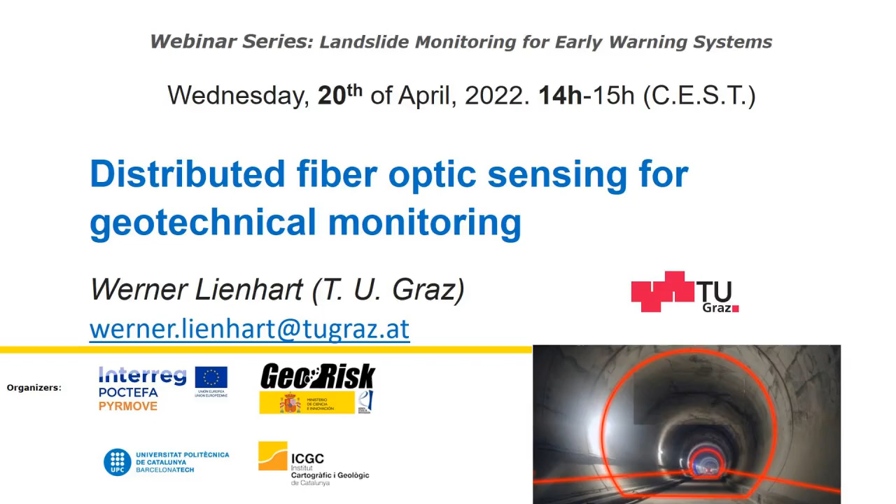It's a really great pleasure for me to be here, at least virtually, and to share my personal experience and also the experience of my team in distributed fiber optic monitoring with a special focus on geotechnical monitoring.

As Jose already said, by profession I'm a geodesist, so I studied geodesy at Graz University of Technology and also at Nottingham Trent University in the UK. Regarding measurement technologies, I have a background in classical geodetic sensors, meaning total station, laser scanners, GNSS sensors, and also from my role as a product manager at Leica Geosystems at the headquarters in Switzerland. For more than 10 years, I've been full professor at Graz University of Technology, where I'm head of the Institute of Engineering Geodesy and Measurement Systems.

Because we see that fiber optic sensing is really ready to go on the market, we also founded a spin-off company last year, ACI Monitoring. There we handle the more proven technologies from an industrial company side, while what is still research stays at the university. As already said, I'm Vice President of the International Society for Structural Health Monitoring of Intelligent Infrastructure, ISHMII, and I'm also President of the Austrian Geodetic Commission.

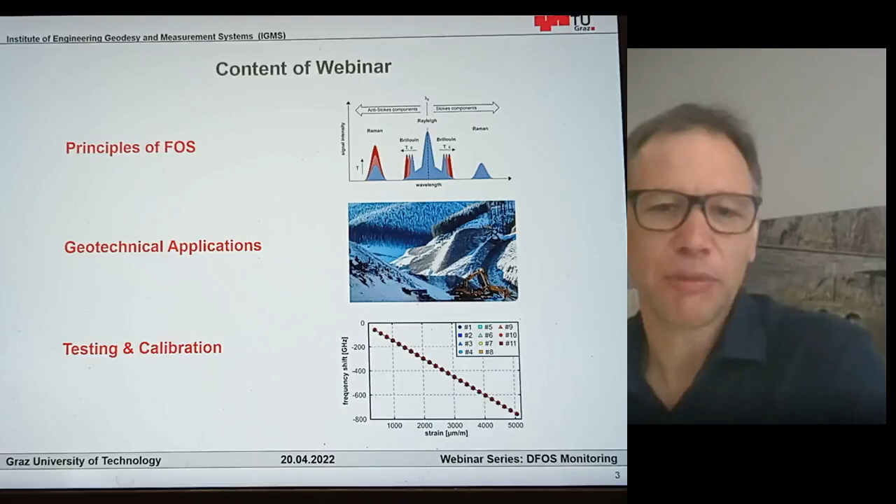What I also want to highlight today is that testing and calibration is also a very important aspect in order to perform a successful fiber optic sensing monitoring project. So this is the program for today. We have about 40 minutes. If you have questions, just type them into the chat or ask them at the end of this talk.

When we talk about fiber optic sensing, there are some common principles. Historically, fiber optic sensing started with sending light into a fiber and having one specific section of the fiber with a strong back reflection. So historically speaking, sensing started with single point sensors. These were very often interferometric sensors having mirrors inscribed into their fiber, giving a strong back reflection. By, for instance, interferometric principle, it was possible to utilize light along the fiber as a sensing device - very accurate, also dynamic measurements. However, the drawback here is you still need one cable for one sensor.

It became more important and more interesting when we talk about distributed or quasi-distributed fiber optic sensing. Quasi-distributed fiber optic sensing means we have several measurement locations along the fiber. One example would be fiber Bragg gratings - wavelength-dependent mirrors where you can have tens of sensors along the same line. This is already a big advantage compared to, let's say, classical resistive strain gauges, since with one cable you can depict lots of measurement positions along your fiber.

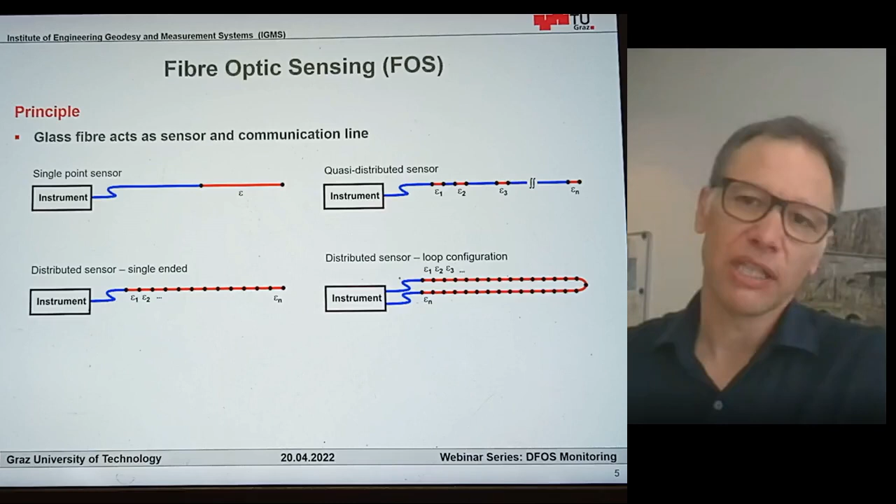There are single-ended configurations, there are loop configurations, but what's important here is range and spatial resolution. Typical values are: if we go for long ranges, let's say several tens of kilometers, we usually have a spatial resolution in the range of half a meter or a meter, so rather broad spatial resolution, but very long ranges, well suited for long linear infrastructure like pipelines or railway tracks.

Or we could go for shorter range, let's say a few tens of meters or maybe 1 or 2 kilometers. Here we can achieve a spatial resolution of about 1 centimeter. Either way, we are able to realize thousands of measurement positions with just one single measurement. So we send out one light pulse into the fiber and obtain a lot of information along that fiber. This is the basic principle of distributed fiber optic sensing.

And when we go further into that, we can also see different technologies in distributed fiber optic sensing. So let us first take a look at the difference between data communication and distributed fiber optic sensing. In data communication, the main goal is to transmit information along the fiber. So light is injected, transmitted, and the light at the end of the fiber is being analyzed.

In distributed fiber optic sensing, we actually do not really care how much is ending up at the end of the fiber. We are working with back reflected light. And depending on the application, we talk about distributed strain sensing (DSS), distributed temperature sensing (DTS), or distributed acoustic sensing. So one can think of that like thousands of resistive strain gauges, thousands of microphones, or thousands of temperature sensors along the same fiber.

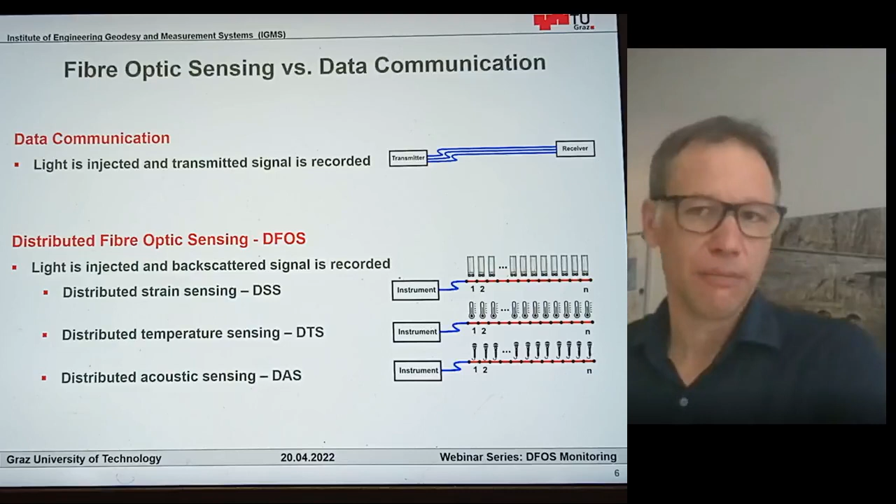So how does this now work? If you take a look at a typical setup, we send a light pulse into the fiber. And this light is actually being reflected at every location along the fiber due to natural inhomogeneities of the fiber. And this backscatter signal is sensitive to either strain or temperature, or to strain and temperature.

So let us take a look at this example. We send in a light pulse. We have a certain carrier wavelength and we send out a light pulse. Most of the light is being reflected at the same wavelength. So the back reflected signal has the same wavelength as the incoming signal.

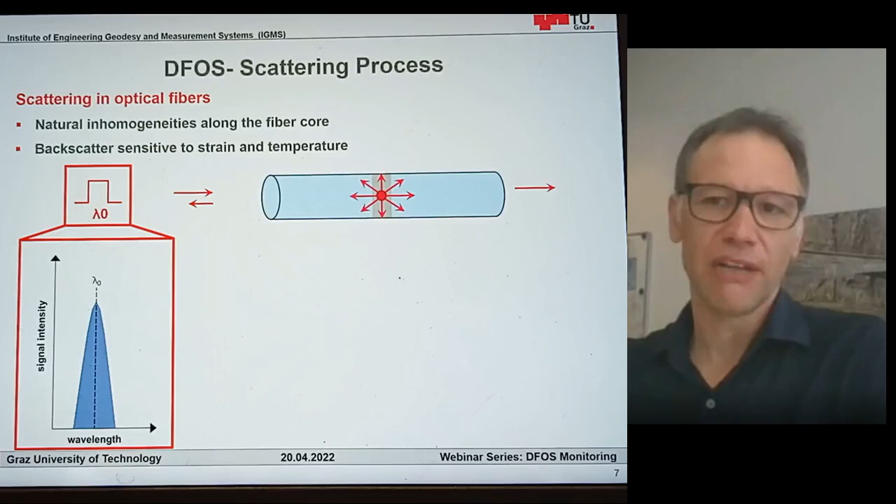However, there are also other components being reflected. These are the so-called anti-Stokes and Stokes components. Some of you may have seen that graphic in different ways already. One way would be if you take a look at the Raman backscattering. This is further off the central wavelength, and here we have a Stokes and an anti-Stokes component.

Interesting here is that mainly the anti-Stokes component is sensitive to temperature. So it's almost insensitive to strain, with a strong temperature sensitivity in the anti-Stokes component. So what you can see here, if we monitor the intensity or the ratio of intensities of the anti-Stokes component, then we can get information about the temperature along the fiber.

If you take a look at a different effect, which would be Brillouin backscattering, here we do see a wavelength shift. So we see a frequency shift in case of temperature and strain changes. And this enables us to get information about deformation along the fiber.

If we put some numbers to that principle, when we take a look at Rayleigh backscattering, it is usually used in high resolution distributed strain sensing and in distributed acoustic sensing. When we talk about high resolution strain sensing, this means we have a measurement precision in the range of tenths of a kelvin and about 1 microstrain, and a spatial resolution of about 10 millimeters or better, but only over very short range.

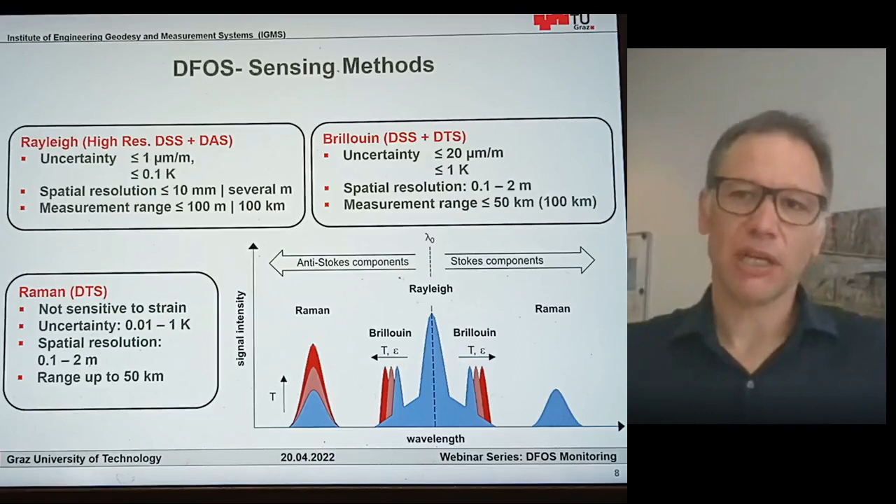Regarding strain sensing, for long distances, the technology to use is Brillouin-based measurements. Here, as I said, we are sensitive to strain and temperature, but with the right setup, we can compensate the temperature dependency, and we end up with a resolution in the range of 10 to 20 microstrain, but for very long distances, also about 30, 40, 50 kilometers, or even hundreds of kilometers.

So these are a few things to note. When we talk about distributed strain sensing, we work with natural back reflection. Here we have three different components. There's Rayleigh backscattering, which has the same wavelength as the incoming wave, mainly used for high resolution strain sensing and for DAS. We have Raman backscattering, where we have a temperature dependency, which matches an intensity change in the anti-Stokes component. And we have Brillouin backscattering, which causes frequency shifts when the strain and/or temperature changes.

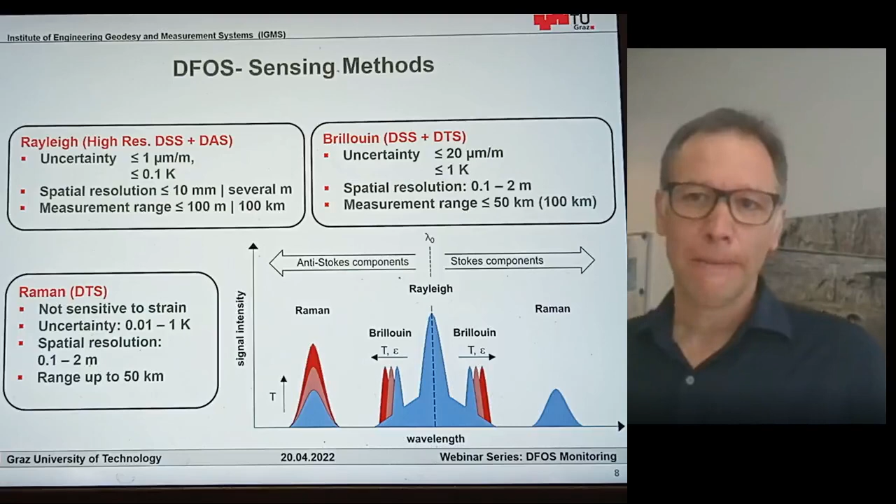So this is just a little bit of background. We're coming back to that at the end of the presentation when we talk a little bit about calibration. But the main focus now is how can this technology be deployed in geotechnical monitoring? So we're going to take a look at different geotechnical applications, and actually whatever you can think of has already been done with fiber optics.

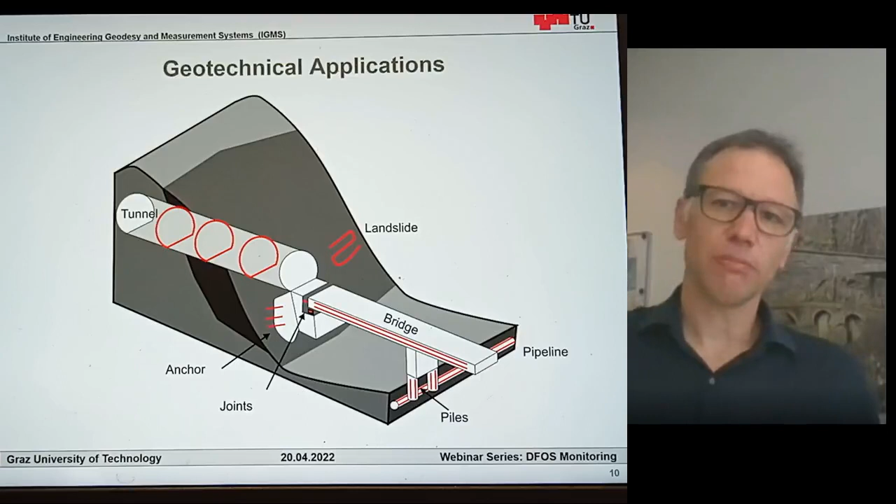So fiber optic sensing, or distributed fiber optic sensing, has already been employed for tunneling applications. It has been used for landslide applications. It has been used for concrete structures like bridges and piles.

Out of this selection, I have now chosen three different areas where I would like to show you what can be done, but also show you some principal challenges which occur when you deal with distributed fiber optic sensing. The first example I want to show today is an application about a reinforced earth structure.

As some of you may know, we are currently building three very large tunnels in Austria: one being the Semmering base tunnel, another being the Koralm tunnel, and the third the Brenner base tunnel. Here we're talking about the Semmering base tunnel, which has two tubes, each 27 kilometers long.

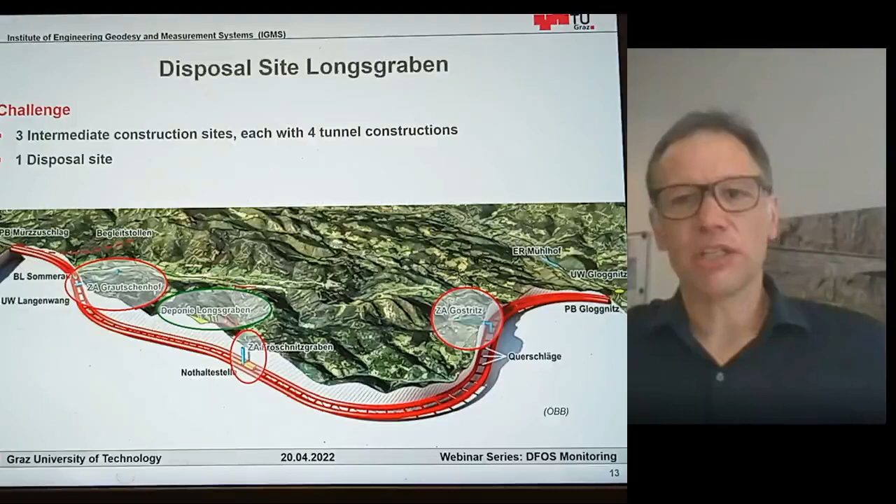How does such a disposal site look like in an alpine area? It's pretty simple: you have a valley and you basically fill it up. This is the valley as it was before construction activity started. The trees have been removed, and now it's more or less prepared for the landfill. However, as you always have in those alpine valleys, there's a stream at the bottom of the valley.

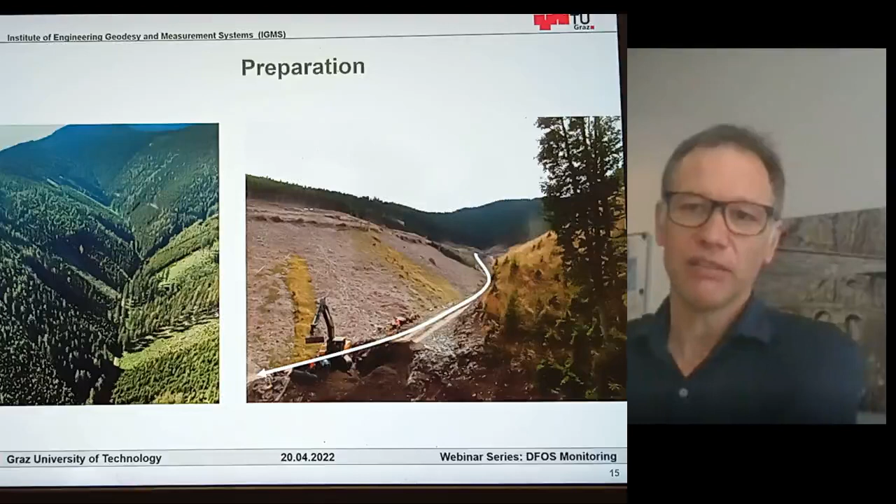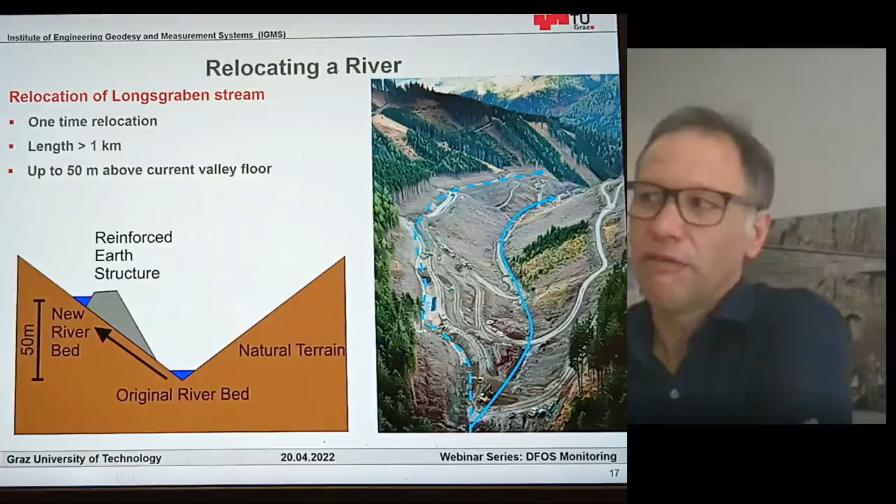From a technical point of view, the easiest way would have been to put that stream into a massive tube, but this was not allowed due to environmental reasons. So the final solution has been to take this river stream and shift it up 50 meters into a new riverbed, supported by a reinforced earth structure, and then fill up the terrain. In the end, this new riverbed will finally be again at the bottom of the newly constructed valley.

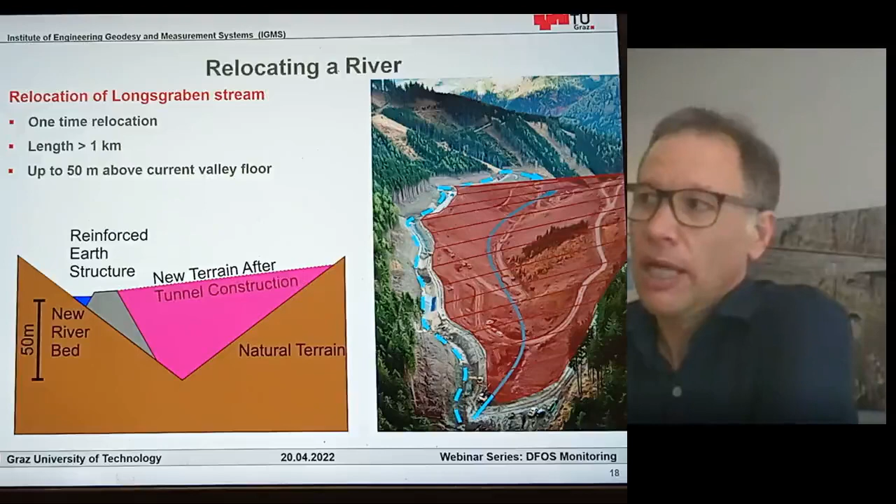The big question was: what happens during the construction phase? After the whole valley is filled up, everything is fine, because then the retaining wall cannot fall over anymore. However, during construction, it was planned to have a very high, very steep reinforced slope in order to maximize the volume available for the disposal site.

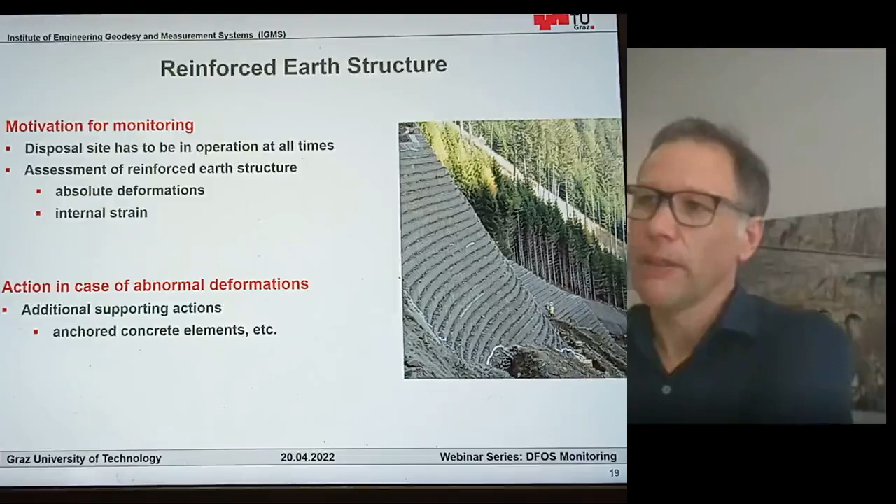The disposal site has to be in operation at all times, and therefore monitoring was needed. The monitoring system consisted of two parts: one was to determine absolute deformations of the dam, meaning tilting or settlements, but also to get information about the internal strain, meaning what is the current utilization grade of the geogrids—are they close to rupture, or is everything still intact?

There was also an action plan behind this, so in case thresholds would have been exceeded, additional supporting actions would have had to be taken.

What I like about this example is that it's a typical setup in most of our monitoring projects when we use distributed fiber optic sensing. Very often fiber optic sensing is not the only technology being used, but it complements traditional technologies. Like in this case, we have total station measurements to points on the surface of the structure, so we know about absolute displacements, rigid body motions, and possible tilting or settlement of the whole structure. But what we don't see is any idea about the internal strain distribution, and this is where distributed fiber optic measurements come into place.

Here we are going to take a look at one-dimensional longitudinal strain, strain basically being a length change divided by base length. So here we're interested in how the strain looks like in the longitudinal direction.

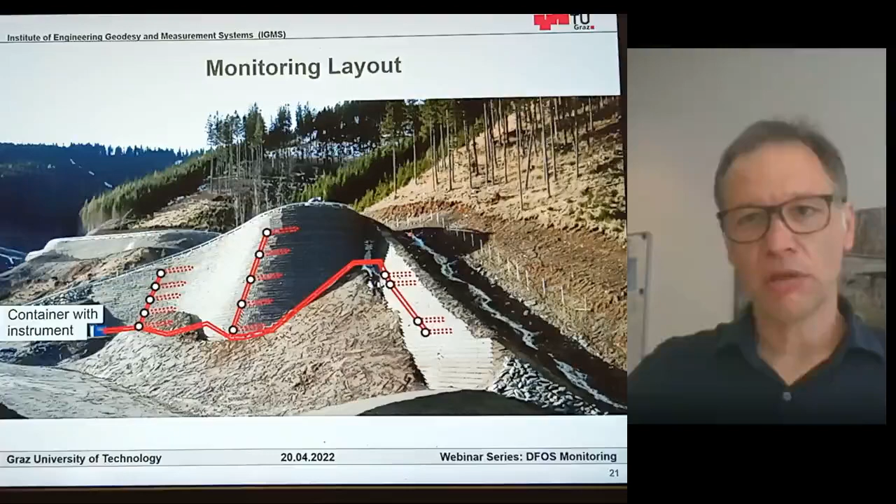But also, that system was meant to be there for the long term, basically for the time until the full disposal site is filled up, in order to see if there may be some problematic situations occurring during operation. So let us take a look now at both situations, first at the construction time, then at the long-term strain development.

So what we can see here is the strain development during the construction phase. We are going to take a zoom look into one of the cross sections. Actually, we are looking inside of the earth structure, an area which is typically not accessible with classical geodetic measurements.

And what we can see, as expected, is an increase during construction as more and more material is piled up on top of that level. However, even after construction stopped, we can still see some creeping behavior, which slowly stabilizes. Here we are at strain rates of about 1% or a little more, which is still perfectly fine for the sensors, but also fine for the geogrids as well.

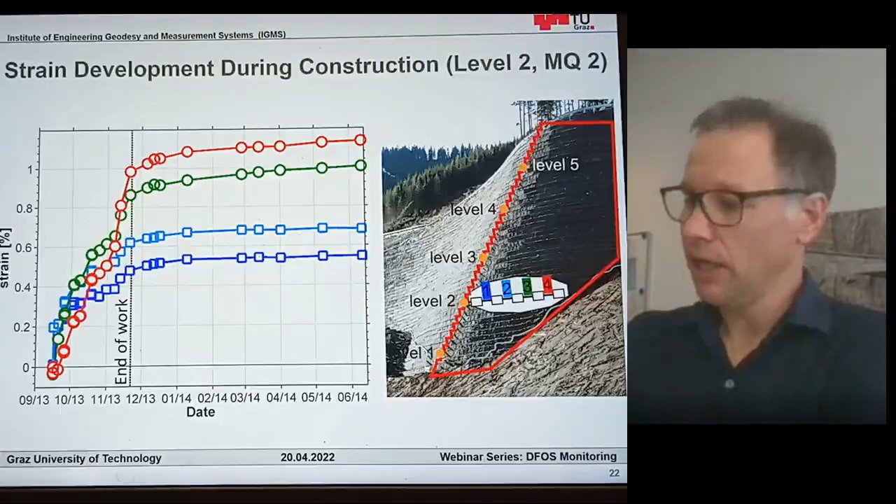So this was the construction phase. I want to give you some pictures of how the structure looks. Here we can still see right after construction finished, without any vegetation.

This is then 2016. We can see already grass coming up again, however the landfill just started. About 3 years later, from the same spot, you can see that the disposal site is almost full. You can see here just a massive amount of volume, which is coming from the 3 construction sites.

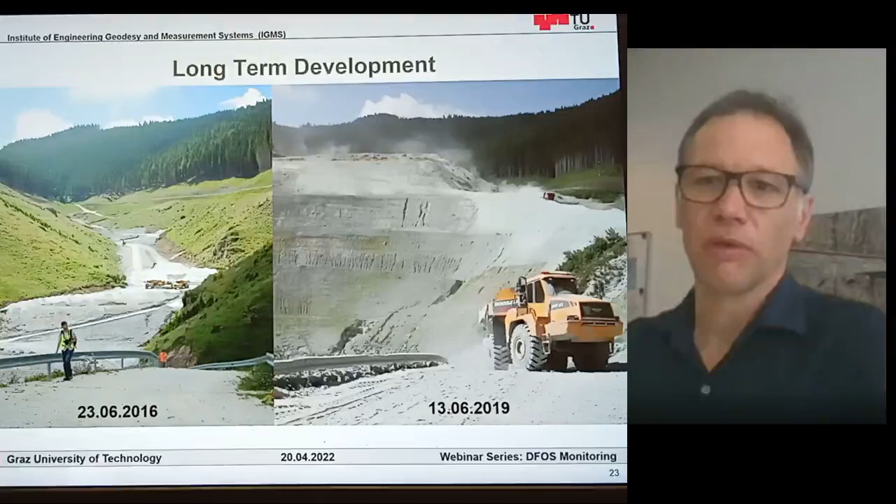When we take a look now at the long-term strain evolution, we do see again the starting phase. We can see everything stabilizing, and suddenly we see a jump in the data series. Between these two measurement epochs, suddenly there was a massive increase of strain. The question was, what happened at this specific point in time?

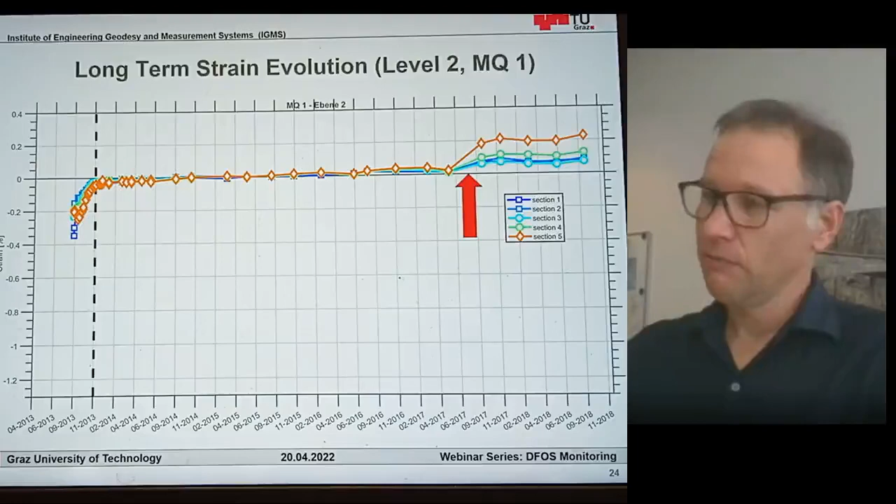Actually nothing was wrong with the structure itself. There were some modifications being made. When we take a closer look, we can see a curved section of the structure with a rather narrow curve, which works only for regular sized trucks, but not for the big dumpers.

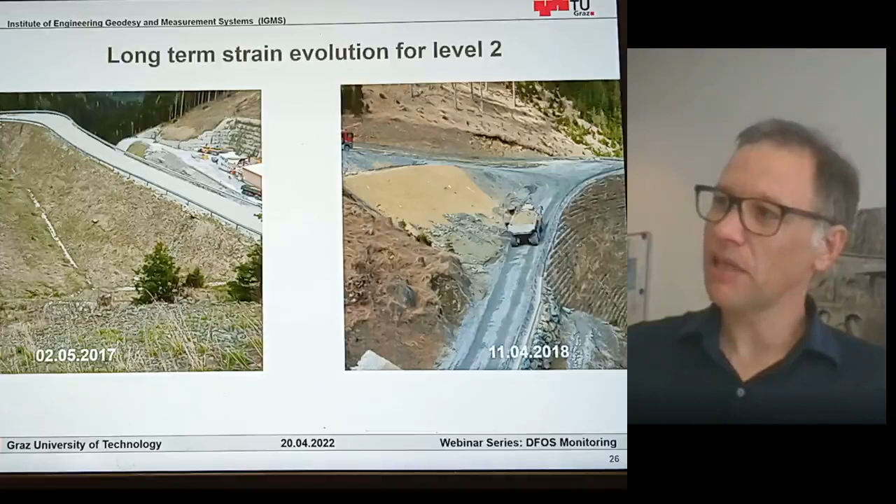In order to be able to cross or pass by here with heavier trucks, it was necessary to fill up this area as well, as you can see on the right-hand side. So we can see the situation before and then afterwards. There's much more space now for making the turn, which enables heavier machinery to get around the corner as well. So we do see the impact of this modification of the structure.

Everything is still fine, so no problem for the geogrids, but still we can detect those changes. So everything worked fine during the construction phase, small strain development after construction, then that one jump due to the modification, and everything was okay.

And actually now the whole area is filled up, and the reinforced earth structure cannot topple over anymore anyhow, since the disposal site is more or less closed because it became full. So this was one example where we can already see that the technology works for several years.

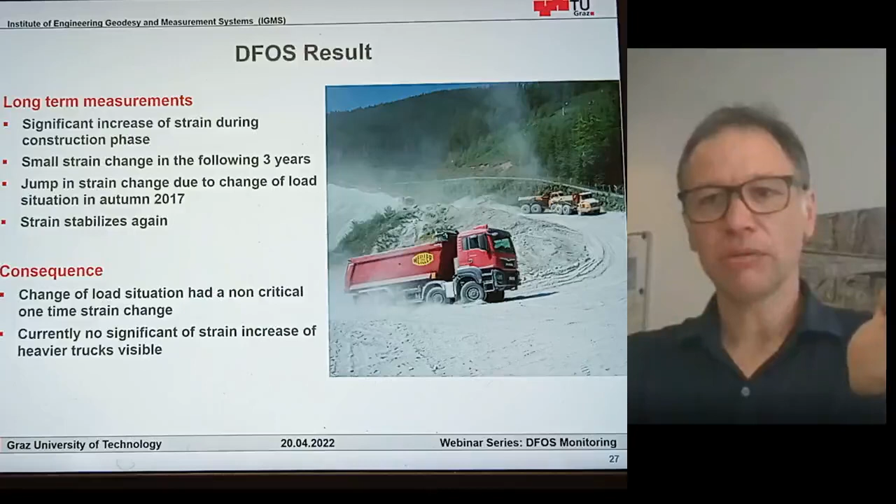We can detect changes. However, in that application, the main focus was just measurements along the fiber axis, so the main result was longitudinal length changes. But let us take a look now at a different application. Next, I would like to show you some applications in tunneling.

Regarding tunneling, we have done a lot of work within the last 10 years. We have equipped outer linings with fiber optic sensing, inner linings with fiber optic sensing, and tunnel lining segments with fiber optic sensing cables. We have also retrofitted existing tunnels by placing fiber optic sensing cables on the already existing surface of the tunnel.

We have installed systems in several railway tunnels, including the Koralm tunnel, the Semmering base tunnel, and the tunnel chain at Zentrum am Berg. We have equipped existing highway tunnels like the Arlberg tunnel and Tauern tunnel, and also a newly constructed tunnel on the highway S7. We are also involved in a sewage tunnel project.

But what's the benefit of having distributed fiber optic sensing in tunneling? I want to show you this by giving two examples, one coming from conventional tunneling and the other one from tunneling with tunnel boring machines.

Let us first take a look at conventional tunneling. A typical situation: classical monitoring, tunnel excavation and displacement measurements with total stations. When we talk about conventional tunneling, you can see that the whole cross section is never cut out at once. You usually have at least 2 or 3 steps.

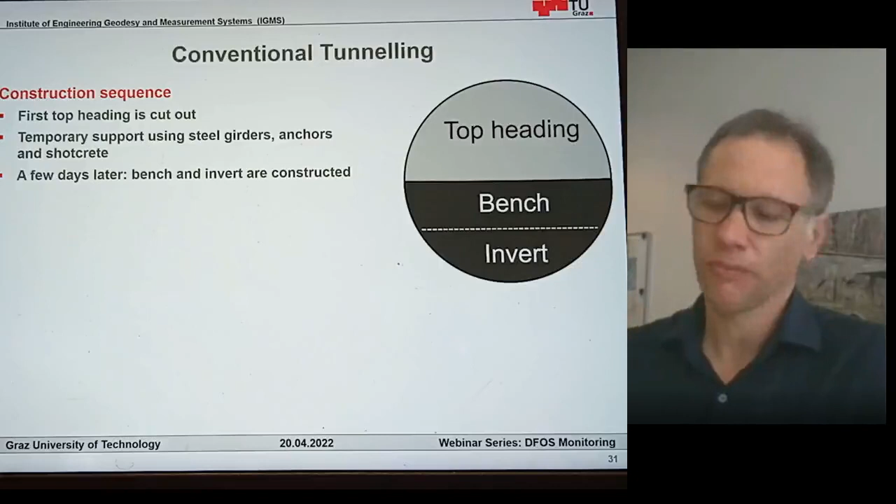First, the top heading is cut. Then this is temporarily supported with steel girders, anchors and shotcrete. After a few days, the bench and invert are being constructed. So you have the top heading advancing, and then with a delay of several days, you have the bench and invert.

The behavior of the lining has to be monitored because deformations are basically allowed, but they have to stabilize after several days, or at least within the first 4 weeks. So monitoring is an essential part of the progress, because the monitoring results determine how you continue construction.

You decide about the excavation round length, how much support you need, how many girders, how many anchors, and also the thickness of the shotcrete layer. So monitoring has a direct impact on the construction sequence, on the construction speed, and on the material needed. Monitoring is a must, and conventionally this is done with classical total station measurements.

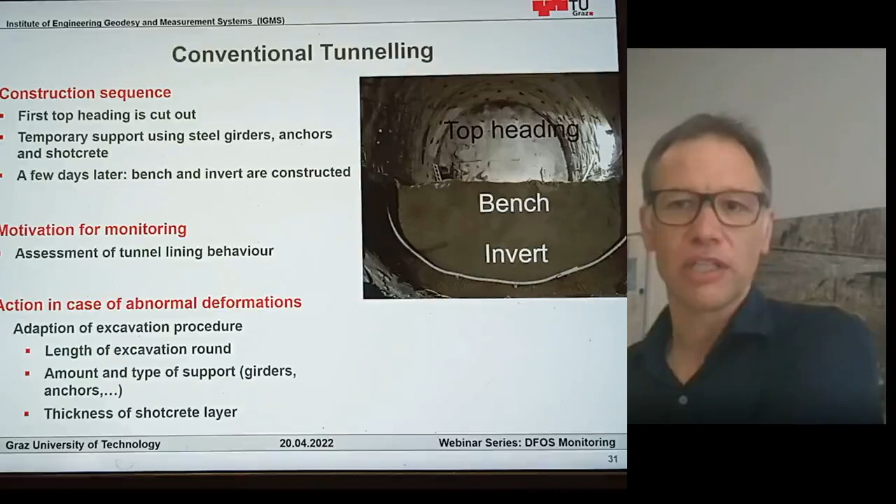You can see here a situation with several cross sections with bireflex targets, all arranged as flashing points along cross sections. Usually you have about 5 to 7 points along the cross section. However, what you can already see is that you don't get a complete picture.

First of all, we only get a few measurement points at one cross section. The bench and invert cannot be monitored. And as measurements are usually carried out only once per day and only close to the tunnel face, you don't really get detailed information about the long-term behavior. And like usual, with a tripod, you're always in the way, so the measurement itself interferes with the construction progress.

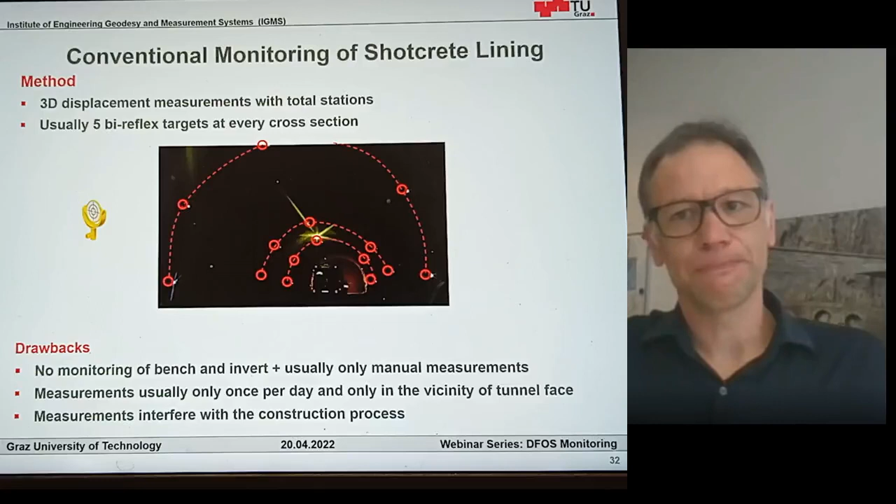Here the idea is to use distributed fiber optic sensing for both the construction and the operation phase of the tunnel. Several cross sections are equipped with fiber optic sensing, and because of the long measurement length that is possible, the instrument itself can be even outside of the tunnel, so the measurement doesn't interfere with construction or operation. Of course, you need some time for the installation, but the measurement itself has no impact on either construction or operation.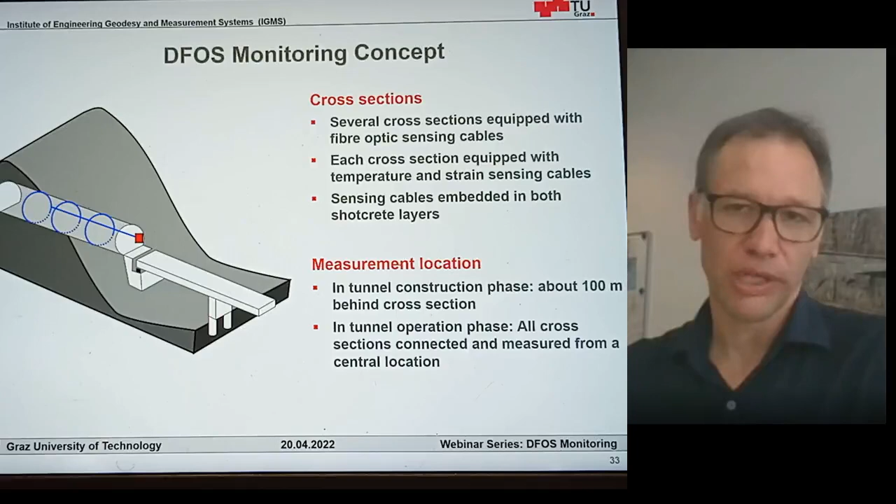What is important to note is sometimes there's a discussion: can dark fibers be used? Dark fibers are fibers within communication cables which are not being used. For distributed acoustic sensing, yes, this can be done. But when we talk about high accurate strain sensing, we do need a specific strain sensing cable.

Let us take a look now at the difference. A communication cable usually consists of a huge number of single mode fibers, but the main purpose of the communication cable is data communication. Therefore, the cable should not experience anything happening on the outside. So the fibers can move freely, at least to a certain extent, within that cable—they could be gel filled, or there could be some air gaps in between.

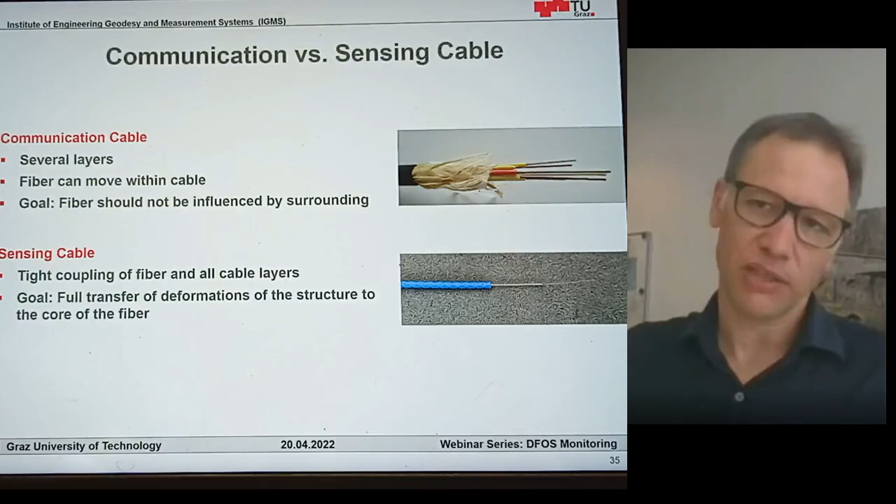When we talk about installations in civil engineering, first of all, the fiber has to survive the installation. Otherwise, the whole progress is meaningless. And therefore, there are different options. Here, just a few examples of how such cables can look like.

You could have a tight buffer fiber, meaning this is the pure fiber, glass fiber itself, with a buffer around it, which just thickens the fiber up and makes it a little bit more robust. The next one would be a fiber in metal tube, so the fiber, and then there's a metal tube where the fiber itself is either clamped or glued within that metal tube.

Then we can have extra additional layers also with some structure which bonds better with the material, for instance concrete. And if there are really very harsh conditions, you can also have some additional steel armoring around it.

Usually you order those fibers on the drum. So you order a cable with a length of several hundreds of meters or even kilometers, and then you just cut off the length that you need for the application, splice the connector to it, and you have a sensing cable customized for your application.

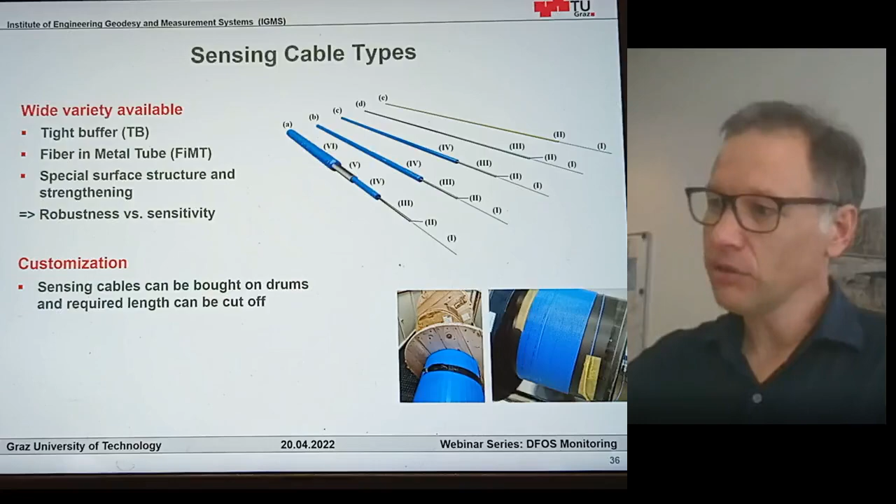We can perform measurements with the instrument far away, but it has to be noted, as a result, we get information what happens at fiber meter 354. In order to know or to give an interpretable result, we have to know where this fiber meter is geographically.

What we usually do is we use conventional total station techniques and measure reflectorless the position of the cable. By doing so, we can relate every single fiber meter to three-dimensional coordinates. So we know at every given point in time where this fiber is actually being laid. And if we know that, we can then make a relation between fiber meter and spatial location.

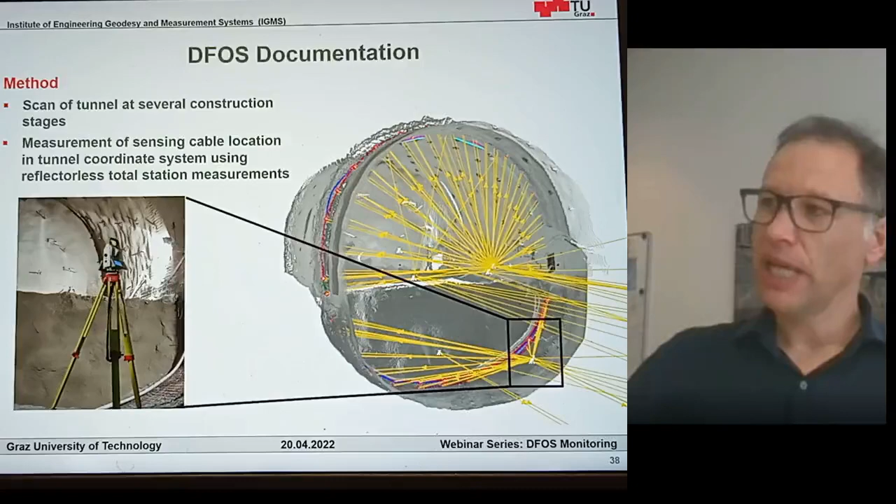And when we talk about now the tunnel progress, what we can see here now, on the right-hand side, you can see our cross-section. Here we're going to see the strain profile, and downward progress advances now into this direction. So what we can see, as the tunnel construction progresses, we can see shortening as expected. We have here shortening, so negative strain. As we continue construction, we have a further increase of or decrease of the strain.

And here only the top heading is being cut out. At the later stage, we can also see that the bench and invert are being cut out, and we can also see now here that the whole ring is being closed, and we can see how the whole cross section shortens. So we can make a display in a spatial way, but we can also then select individual points.

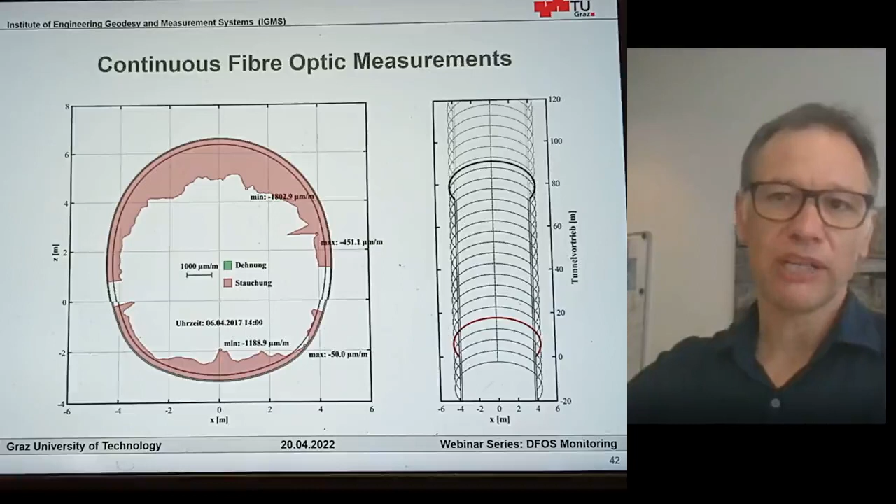And take a look at how this strain develops over time. So we can also take a look at classical time series. And this is what you can see here. On the left-hand side, we can see the strain at given times, shown here with different colors. So each color corresponds to a certain time instance. And when we take now certain locations, we can also take a look at the complete time series.

So here we have continuous measurement during the first weeks. We can see when we're going to take a look at the crown point, how shortening looks like. It's starting to stabilize. But as soon as bench and invert are being cut out, we can see another acceleration, which also stabilizes. So stabilization as expected, then further acceleration when bench and invert are being cut out.

And then another stabilization phase. We can also see as soon as bench and invert are being cut out, we can see here also suddenly positive strain at the shoulder, as this can also go into that direction now, but all of this stabilizes.

The bench and invert stabilizes, and then as the next bench and invert is being cut, we see another acceleration, which also stabilizes. So everything is normal. Now let's take a look at the long term, what's happening over more than a year, about 1.5 years. We can still see some strain, but everything is still in the normal range.

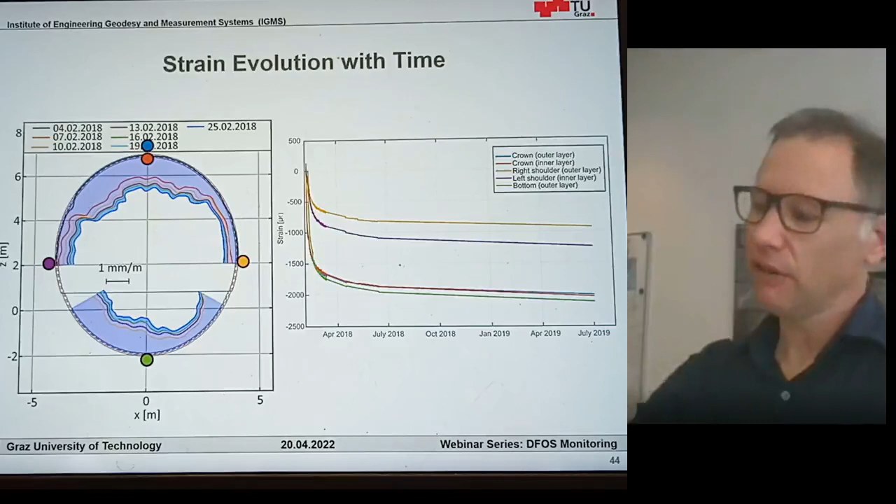This is now embedding in concrete. We are still looking at strain in the longitudinal direction, however now we already have a curved element. When we talk about bridges, or tunneling with tunnel boring machines, we have solid concrete elements. So this is now one tunnel lining segment. Usually a tunnel boring machine places, depending on the tunnel, between 5 to 8 or 9 of these segments.

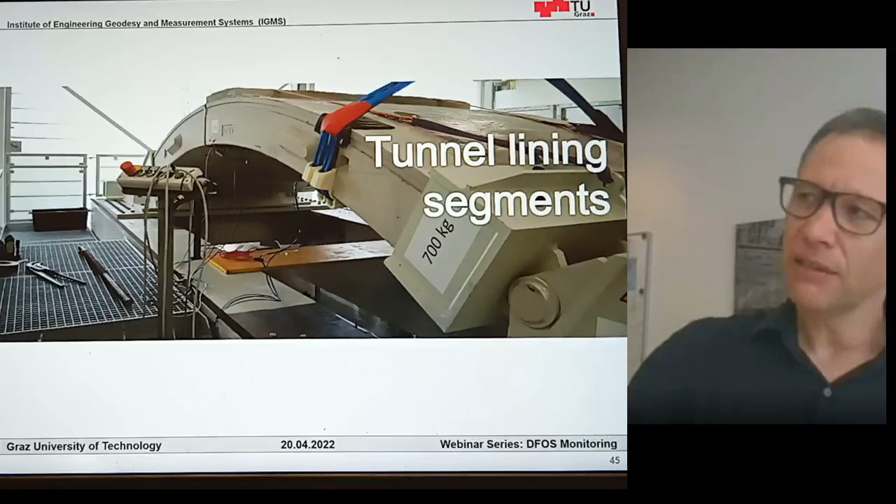And here too we can utilize fiber optic sensing. The idea is we have a segment about 6 meters long, and we place a sensing cable into that segment, routing it on top and at the bottom, not just once but several times. One layout could look like this: we go here on top, down to the bottom, and now we can realize thousands of measurement points.

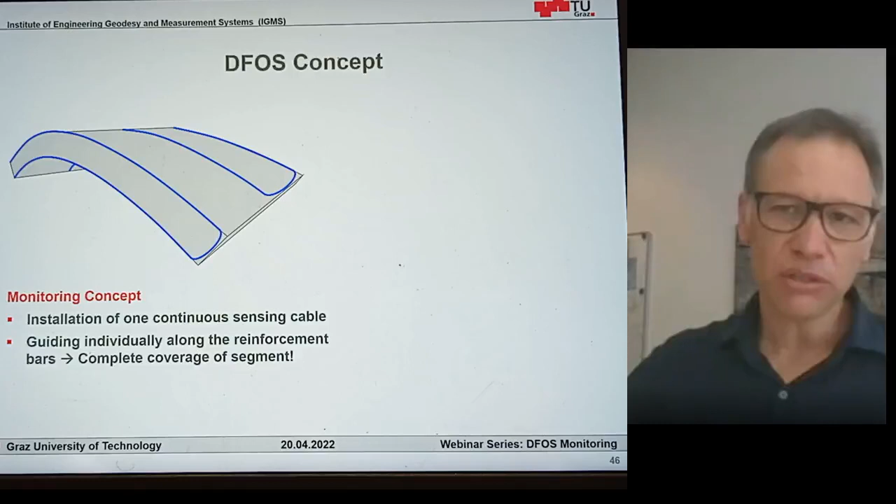The conventional way would be, like you can see here, 2 vibrating wire sensors, so a huge element may only get information at 2 individual points. However, with fiber optics, if you put 70 meters into that segment and measure with a spatial resolution of 1 centimeter, we would get 7,000 measurement points within that one lining segment.

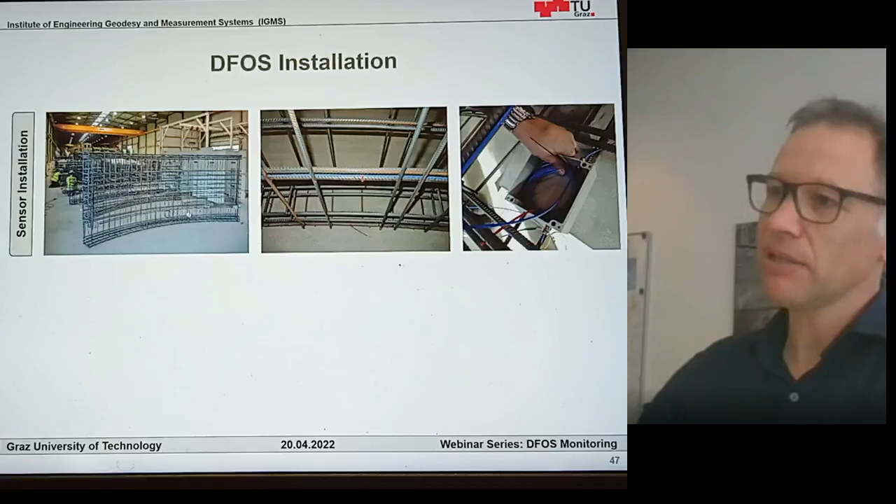Here the advantage is all of this can be equipped under factory conditions. When we look at the tunnel lining segment factory, we can see the different reinforcement cages. We can attach the fiber temporarily with cable ties, but the final bond is made between the concrete and the structure of the cable. Then we have a little box where additional cable length is piled up, and the connector is also placed, and further production continues in a regular way. You can see how the reinforcement cage is placed into the formwork and the final segment after it is cast.

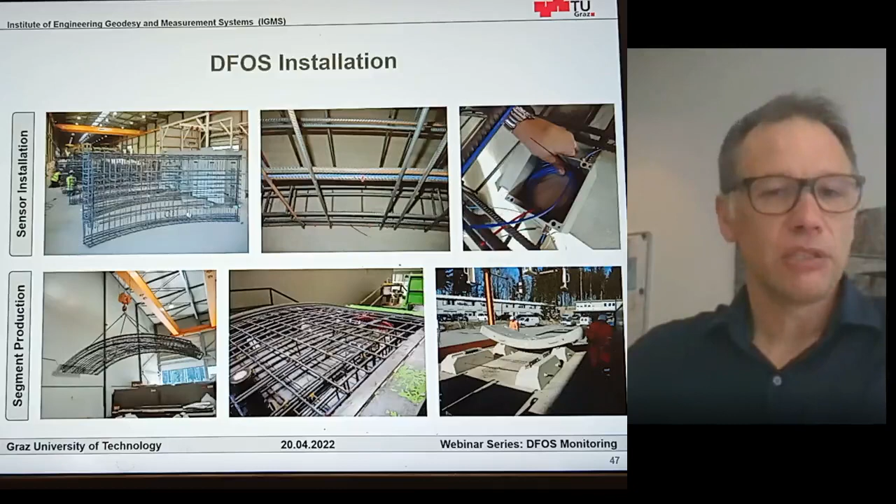So does this work? We can test that in a complete tunnel, but we can also make a loading test. In Austria, we have loading test facilities for tunnel lining segments, and this is what you can see here. In this facility we can apply vertical load and/or horizontal load, but what I want to show you today is an example where vertical load is applied to this tunnel lining segment.

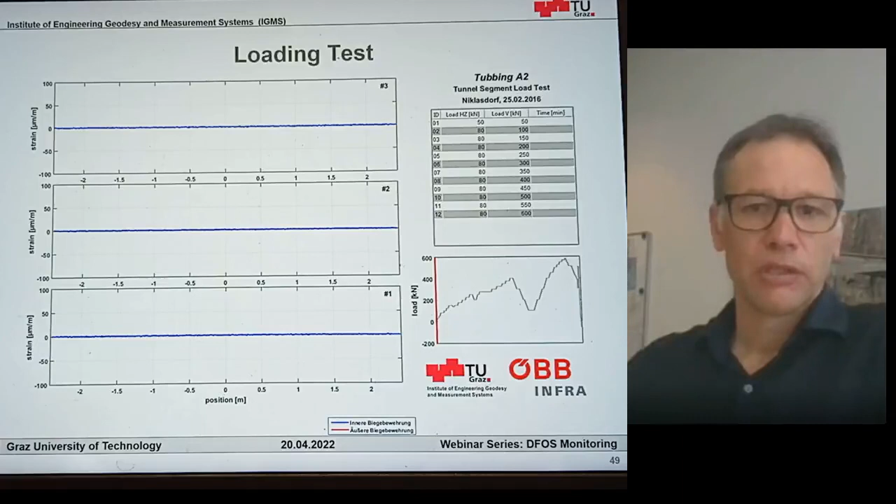What we're going to see now is vertical load applied, and we have here the load regime. We increase the load, decrease the load, increase the load again, and we have 3 different areas. Basically we have one fiber running top and bottom, another top and bottom, another section at the top and bottom. All of this is just one single cable, but running 3 times at the top and 3 times at the bottom. Let's now take a look at what's actually happening when we start applying the load.

We apply the load, and of course what's happening at the top side where you apply the load, you will see shortening, and on the bottom side you will see positive strain. So on one side shortening, the other side elongation. Note that in this case the force itself is not within the fiber axis, it's actually orthogonal to it, so we can also depict deformations orthogonal to our main sensitive axis. This is something we can also utilize when we talk about anchors or soil nails.

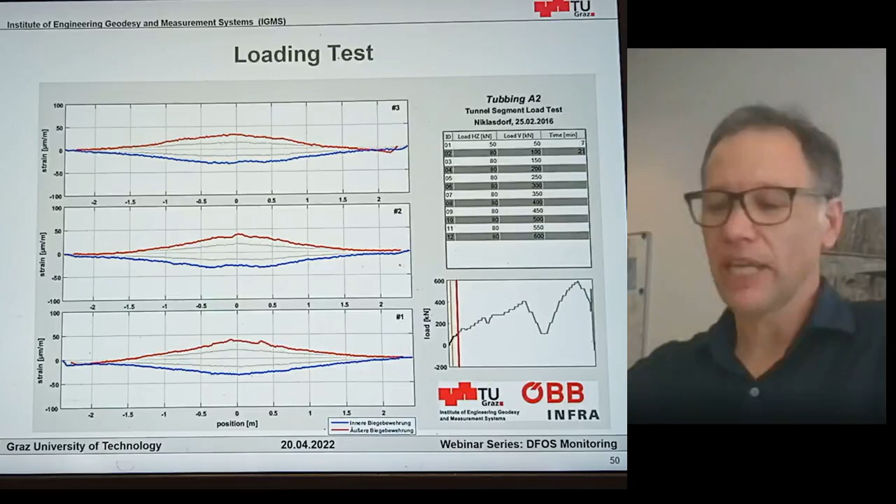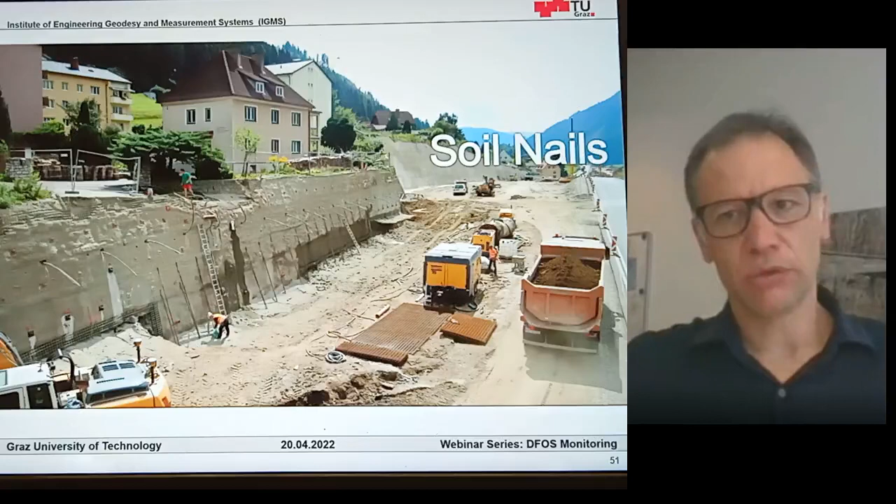This is one example of a highway construction site where temporarily that slope was stabilized with soil nails. Here the idea was also to get information about how those soil nails, sometimes called grouted anchors, behave during construction. What we can do is equip such a nail with fibers, and if we place a fiber at the top and at the bottom, meaning above and below the neutral axis, we can also depict curvature changes.

In this case, when this beam starts to bend, we will see positive strain on the top side, and negative strain on the bottom side. This can be used to calculate the curvature: the difference between these 2 strain readings divided by the distance gives us the curvature. This would be the case if the overall length, meaning the length of the neutral axis, stays the same.

If the length of the neutral axis changes, we can also take that into account, because the average of both readings gives us the longitudinal change, and from this we can also calculate the curvature.

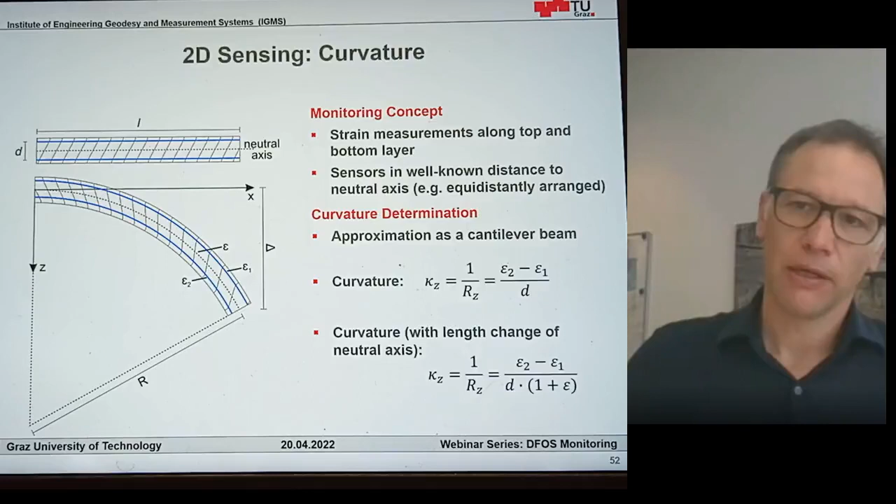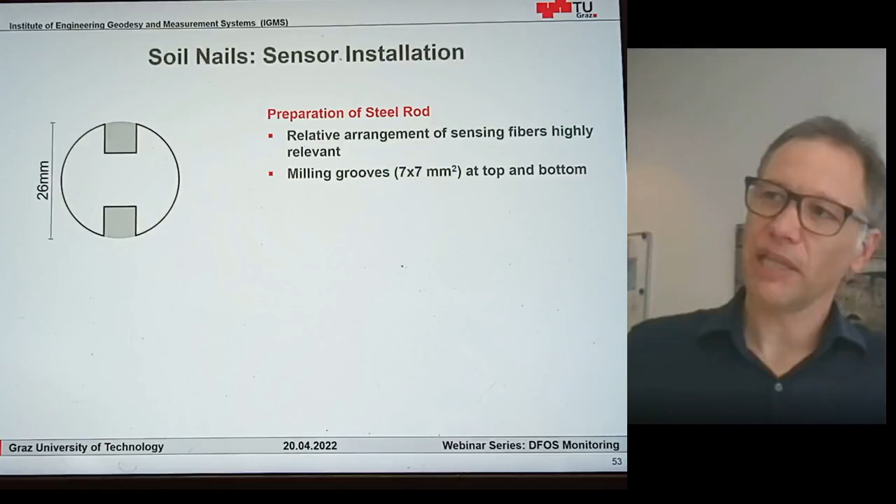Just one example of how this can look. We could have here our soil nail. We have a little groove where the strain sensing fibers are placed, but also one for temperature compensation, running at the top and at the bottom.

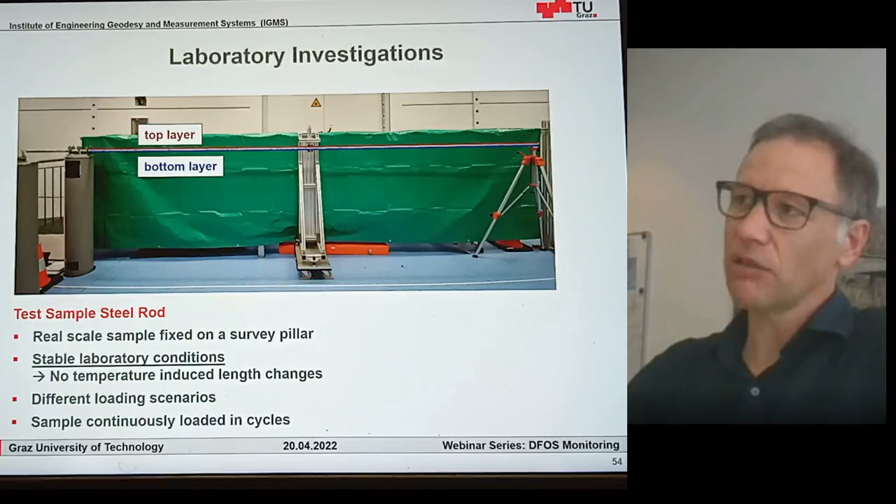Here's another example of how this looks. Of course, before we install it on site, we usually perform testing of the whole setup. In this case, we can see a section about 5 meters long where we apply load. We have the fiber on top, the fiber at the bottom, and in the central area we apply vertical load with a fixed bearing at the left side and a floating bearing on the other side.

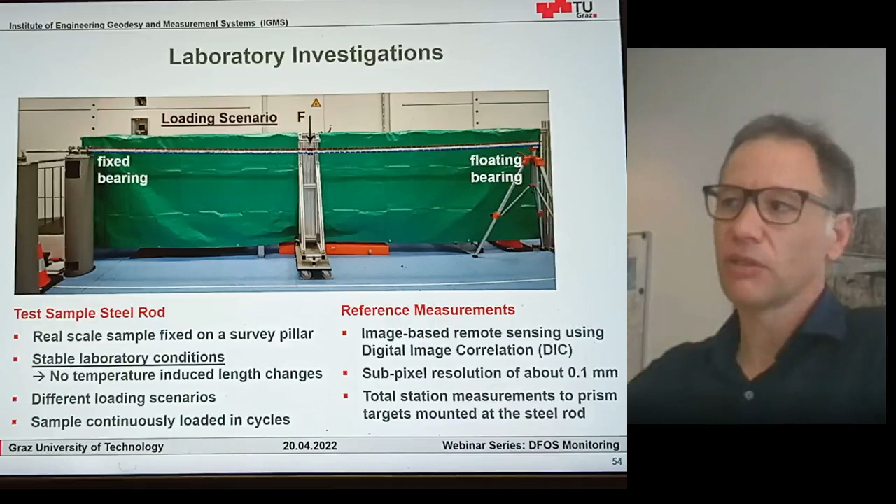Of course, we want to know if our fiber optic readings are reliable, so we have some reference systems. We measure with digital image correlation the displacement, but also with total stations to prism targets.

So how does the result look? When we look at the strain, we see elongation on top, shortening at the bottom. At the point where we are connected, we have the turning point, going from negative strain to positive strain and the other way. We see almost perfectly mirrored behavior.

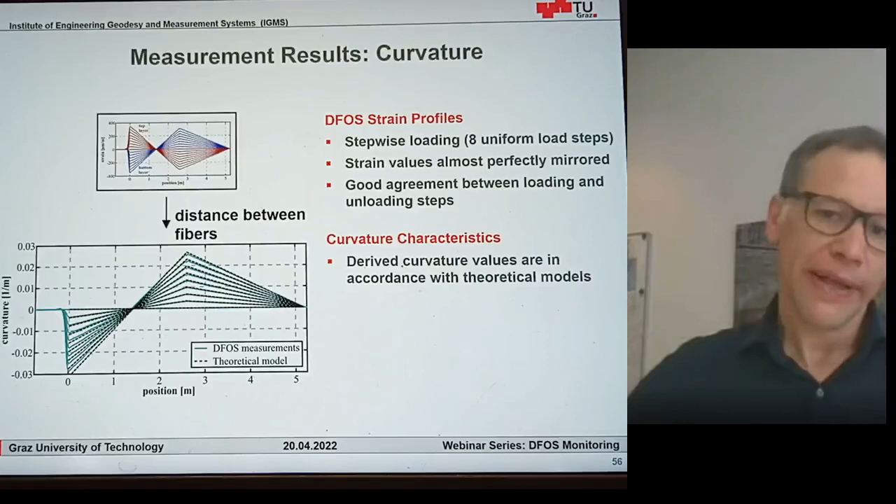Since we know the distance between the two fibers, we can use this to calculate curvature - curvature in one direction, curvature in the other direction. As curvature is the second derivative of displacement, when we know the boundary conditions, which we do here because we have a fixed bearing on one side, we can determine the displacement curve by double integration.

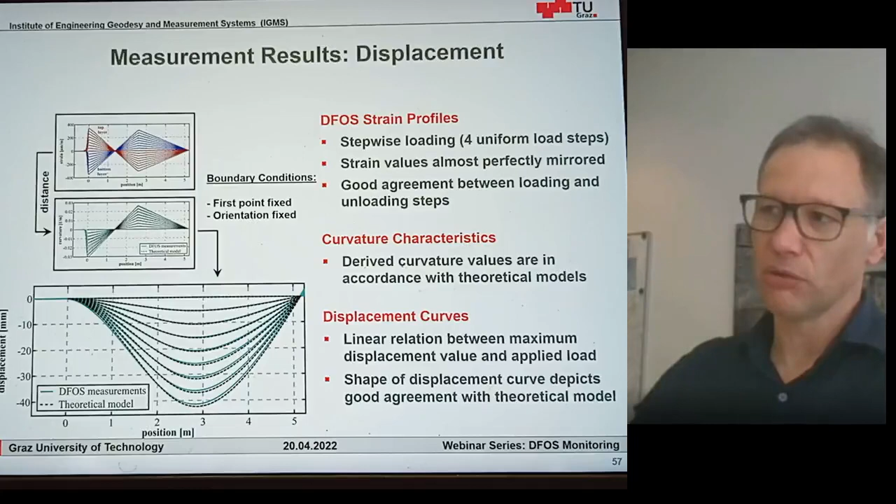So when we use the curvature readings and perform double integration, we get the displacement curve. This can be compared to theoretical numerical models, or we can also do a comparison with digital image correlation. Here we see a very good fit.

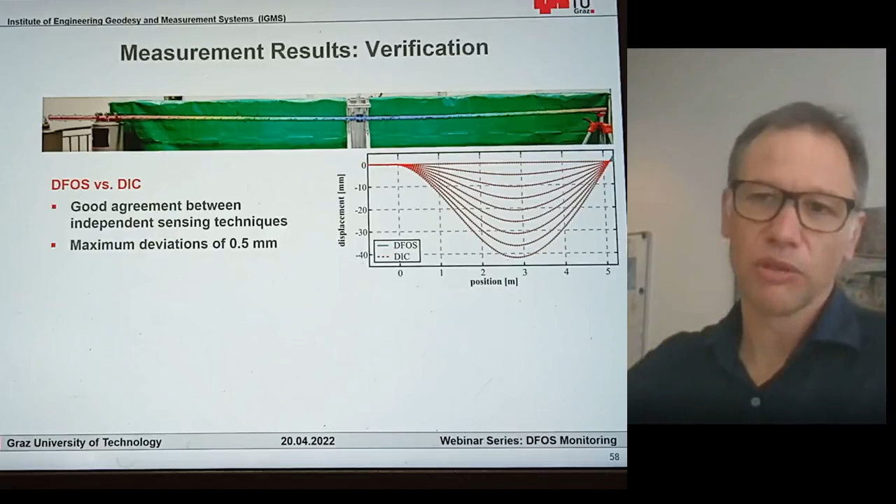The dashed red line is image correlation, the cyan line is the distributed fiber optic sensing. We can see displacements of about 4 centimeters, and the remaining deviations are a few tenths of a millimeter. This is under lab conditions.

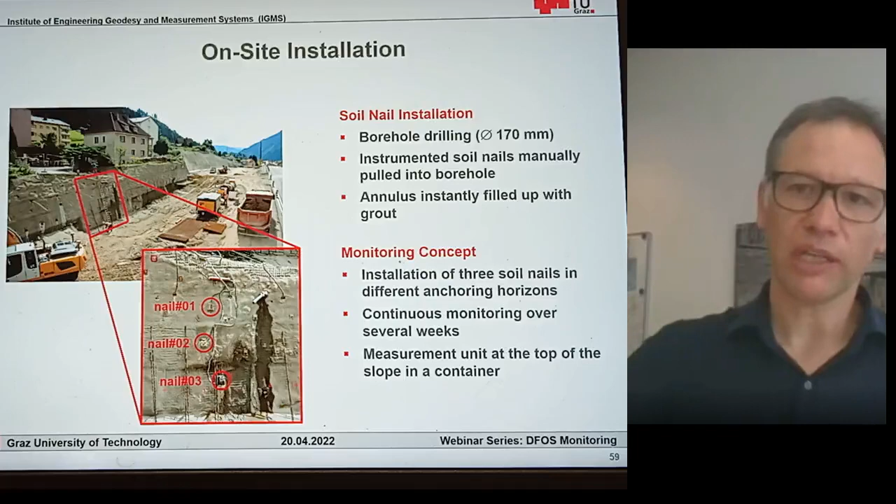But does this also work on site? Let us take a look. Here we have the on-site installation. We've equipped 3 anchors with distributed fiber optic sensing in one cross section, and I'd like to show the result of one of the nails. We can see strain at the top and at the bottom.

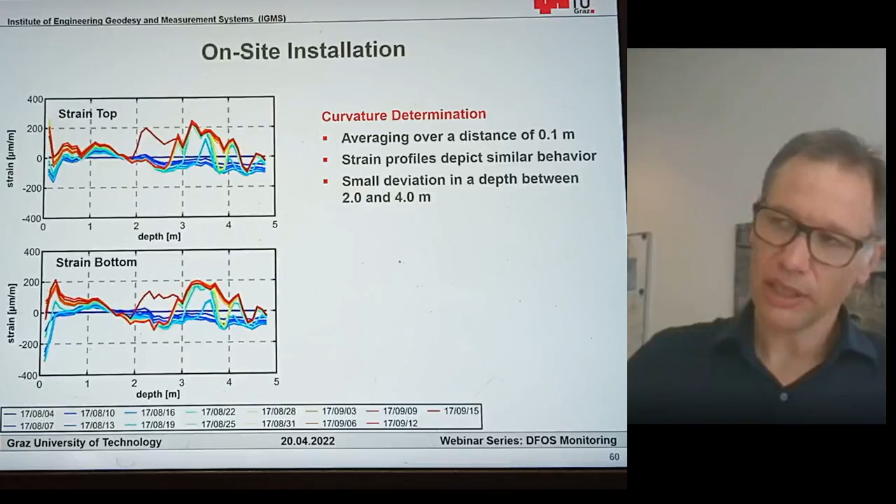We see similar behavior here, positive strain meaning an overall length increase, but we also see different behavior in this area. We use this and calculate the curvature and double integrate. We can then see the bending shape.

Like with borehole inclinometers, we have to make some assumptions about the endpoints. In this case, we assume that the endpoint and end direction are stable, and by doing so, we can see that this anchor also has a displacement shape.

So it's not just elongated, but as you can imagine, when we have this anchor and further material is being removed, this anchor will also start to bend, not just have longitudinal strain. So the main point here is that with the right routing, you can also detect deformations orthogonal to the sensitive axis.

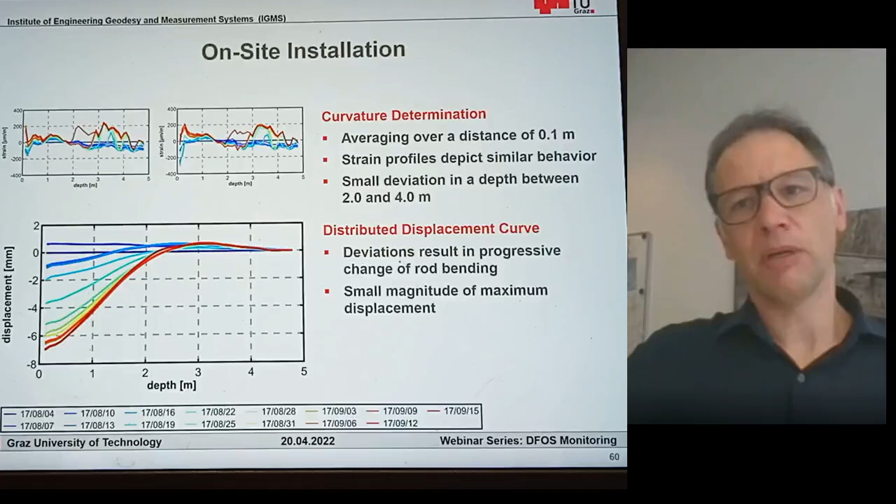So far, we have measurements made without any gaps, no blind spots, and this is essentially important when you don't know where your problem will occur. Let us look back to the tunnel lining segment. We said when we apply vertical force, we see positive strain on one side and negative strain on the other side. So what happens when we increase the load further?

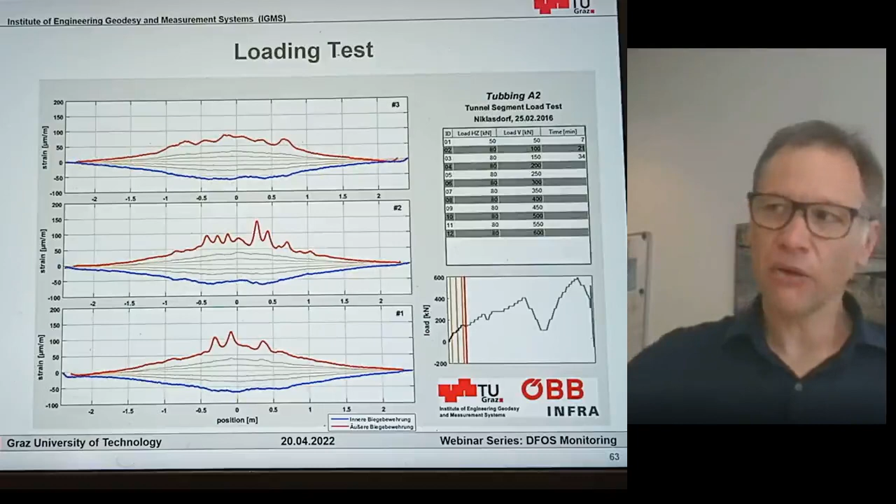What we now see is spikes suddenly occurring - certain locations where we have a massive increase of strain. These spikes increase in height, and their number also increases with further increase of load. This is really interesting, because what we can see here is the development of cracks. Because we have no blind spots, we can exactly tell when and where cracks occur.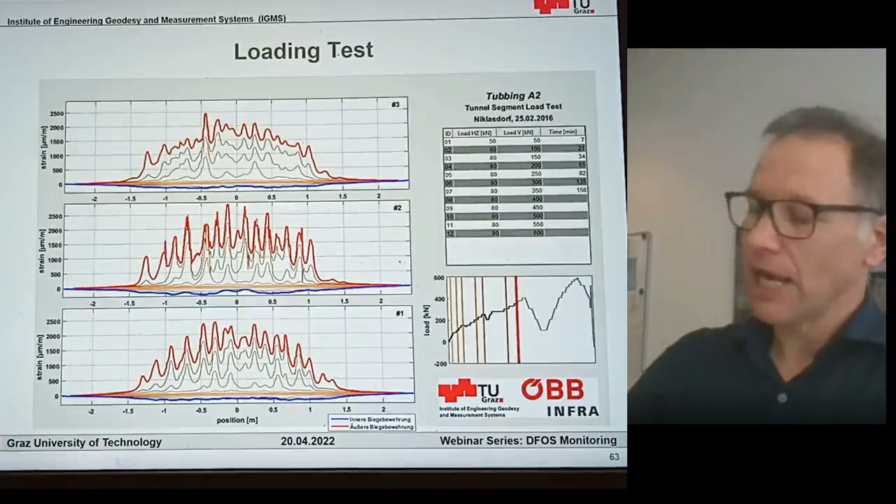So how is that possible? We measure longitudinal strain - strain is nothing else than the length change divided by the base length.

In the initial situation, with the concrete beam, we have a perfectly intact beam, so no strain, no force, nothing. When we start applying load and suddenly have a crack, in theory a crack means we have a certain crack width, delta L, divided by base length. But before, the length of the crack was 0 because there was no crack. This would mean we have a value, let's say 0.3 millimeters divided by 0. So a crack, in theory, means a strain increase up to infinity.

Obviously this does not occur because, depending on the used cable and measurement principle, we will see a strain peak. How this peak looks, how wide and how steep it is, depends on the crack width, the spatial resolution of the instrument, and the cable being used. If you apply the fiber not inside the concrete but mount it on the surface, it also depends on the adhesive you use to connect the fiber to the surface of the beam.

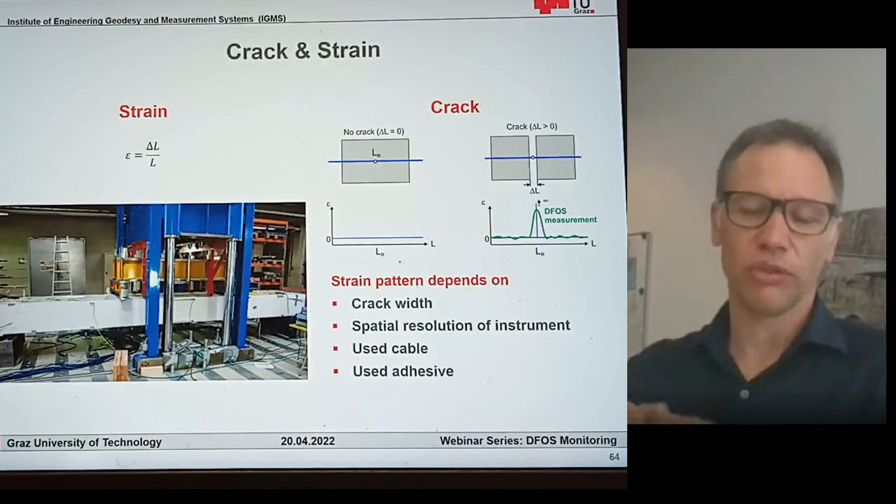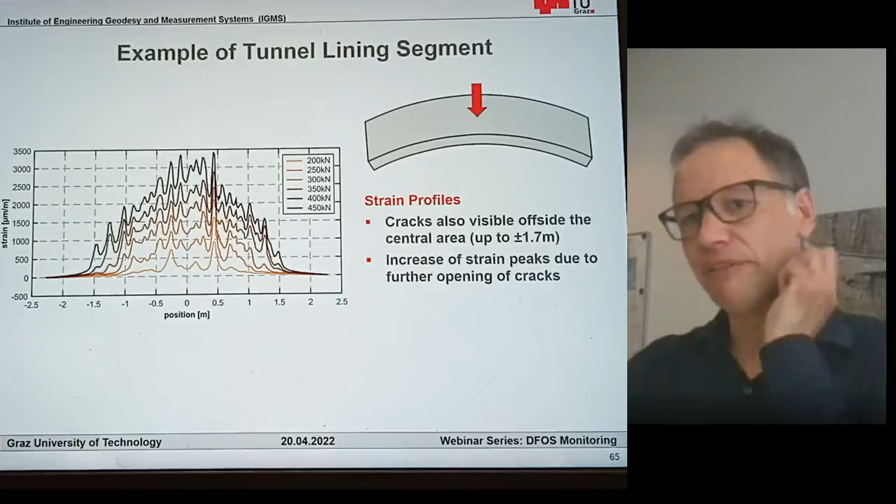By taking a look at, or counting, those spikes, we can see how many cracks occur and where. We also verified this independently with surface-based measurement, in this case with a camera-based system, and we can see a nice fit of the internally measured cracks with the cracks on the surface.

This can now be used to see how different lining segments perform. Depending on the geological situation, there are different types of lining segments with different amounts of reinforcement, maybe also different concrete. For this specific tunnel site, you can see type 2A and type 3 and how they perform differently. Type 2A is the regular lining segment, which shows significant cracking at higher loads. The more robust lining segment of type 3 shows no cracking up until the last loading step.

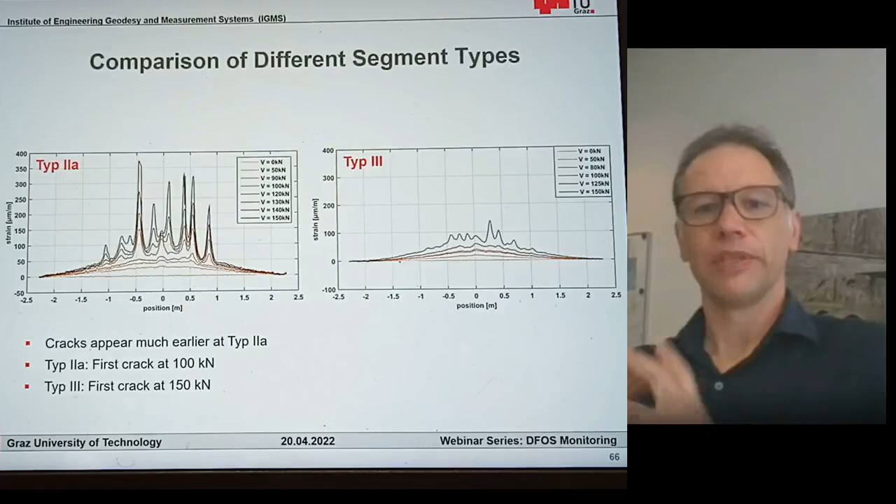So this technology can also be used for verification of the performance of lining segments during load tests. However, it's not only possible under lab conditions, it's also possible in a real environment. Again, the same idea: we have one central measurement location, which can also be outside of the tunnel, and from this, several rings equipped with fiber optic sensing cable can be measured.

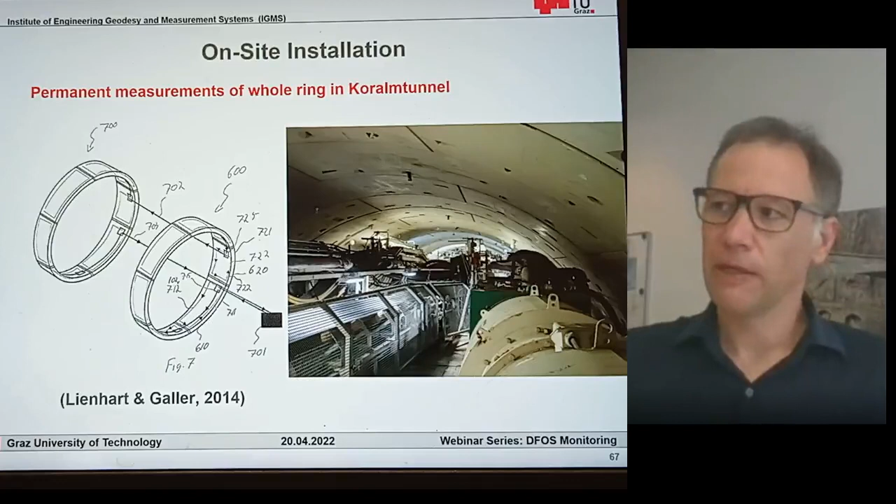Again, if you go back, all of this was measured in one measurement round. The instrument itself is far away. We have the routing, a connection to the next segment, routing, connection to the next segment. So all of this is the result of a single measurement.

So these were some examples. Just note, we can measure longitudinal strain, we can measure strain orthogonal to the sensitive axis, and we can also detect and localize cracks.

But one important thing to remember, going back to the start of this presentation: we measure with light. We send light into a fiber and measure what comes back. Since we measure light, we can measure the reflected intensity, the frequency or inverse wavelength, and the phase. So these are our raw readings: intensity, phase, frequency, or wavelength.

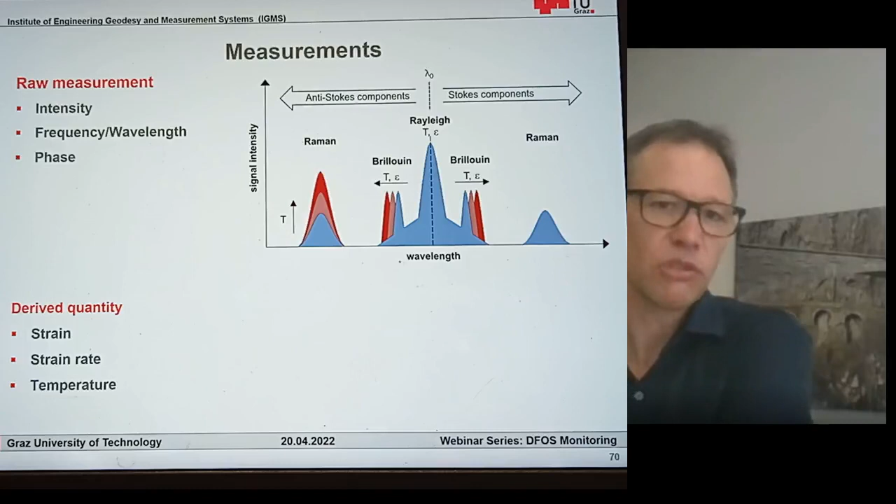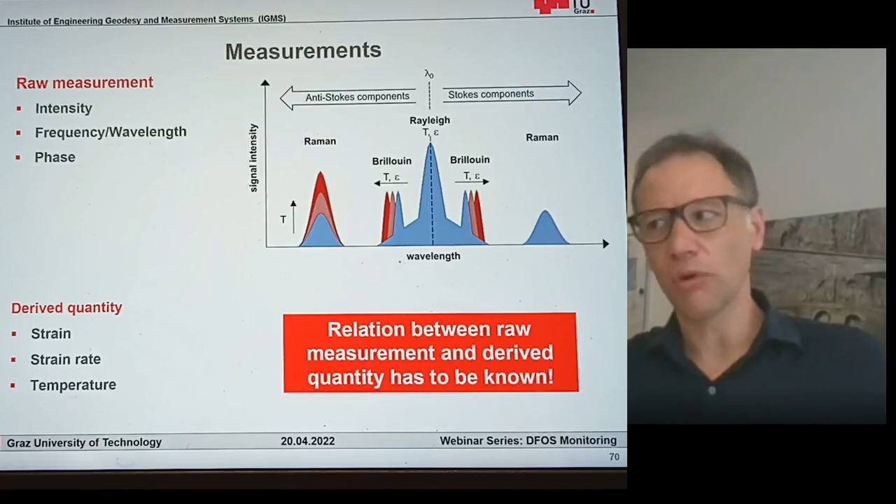But what we actually want to know is either strain rate, when it's about acoustic sensing, or temperature. So we have to convert our raw measurement readings into our desired quantity. Here, very often, a lot of the accuracy is lost, because you could have a very accurate raw measurement, but if you convert it with the wrong conversion function to your derived quantity, you can easily have an error of 10 to 20%. So it's really important that you know the exact relation between your raw measurement and the derived quantity.

For this, we have developed several calibration facilities here at Graz University of Technology. A lot of them are in our measurement lab, where we have a static strain calibration facility and temperature chambers for temperature calibration.

We also have some test setups according to SEAFOM for dynamic testing, and we set up test facilities for the long term, where we pre-strain fibers to a certain extent and measure their behavior over years. Regarding acoustic sensing and the base noise of those sensors, we also utilize the sound studio at the university, where we have a zero noise environment and also no vibration. Just a typical result of one of those...

Calibration runs - here I want to show you strain calibration. So our facility looks like such. We have here a 28-meter long interferometric bench where we can stretch short sections of a cable, but we can also stretch 28 meters in one go. We apply controlled strain, so we elongate that cable with the translation stage. Our reference reading is a reference interferometer, and as we are using very stiff cables, we could have potential tilting, so we also have tilt meters here. We measure the force and so forth.

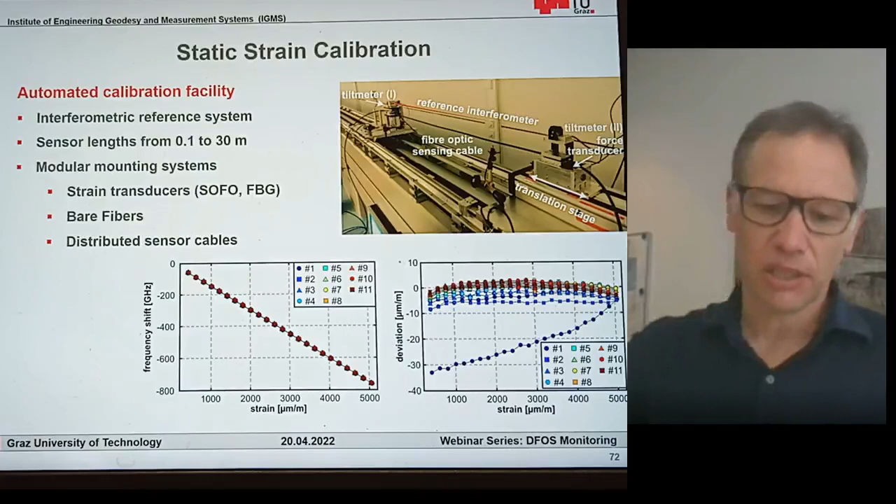But it's really important to have that calibration, because if you just use some standard factors, you could even have a slope value which is about 10 to 20% different. This is something which has to be avoided.

All right, so basically this brings me almost to the end of my presentation. What I wanted to show you today is that distributed fiber optic sensing can be used successfully in geotechnical applications. We can determine longitudinal strain, we can determine curvature with the right routing, and if the boundary conditions are well known, you can also make double integration to come up with displacements. As we don't have any gaps, we can localize effects - it could be cracks when we talk about strain, it could also be leakages in pipelines when we talk about temperature. It's a well-proven technology.

So I know from personal experience it works at least for several decades. What I also wanted to show you today is that calibration is crucial for reliable results - I just showed one example here. From our experience, fiber optic sensing very often doesn't really replace conventional techniques, but it complements them. For instance, in tunneling, we still obviously need geodetic measurements, but we may not need them that often. We can thin out the measurement interval of the total station measurements and have less disturbance of the construction process, filling those gaps successfully with distributed fiber optic sensing.

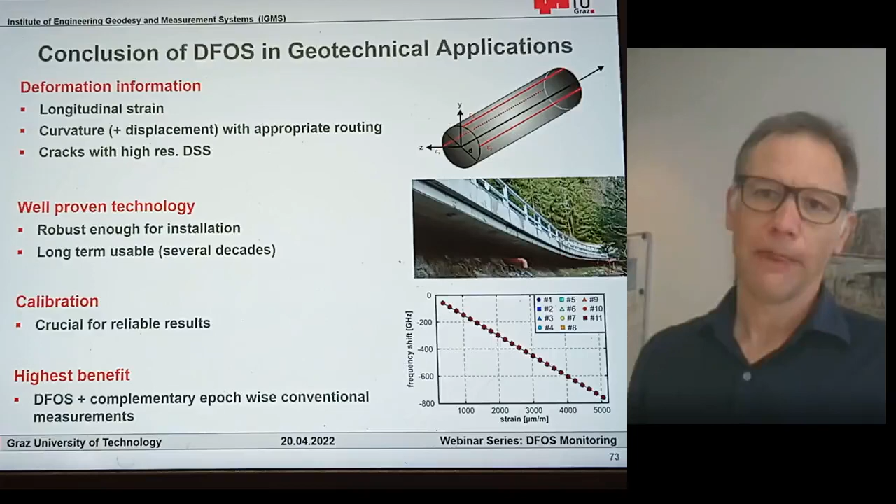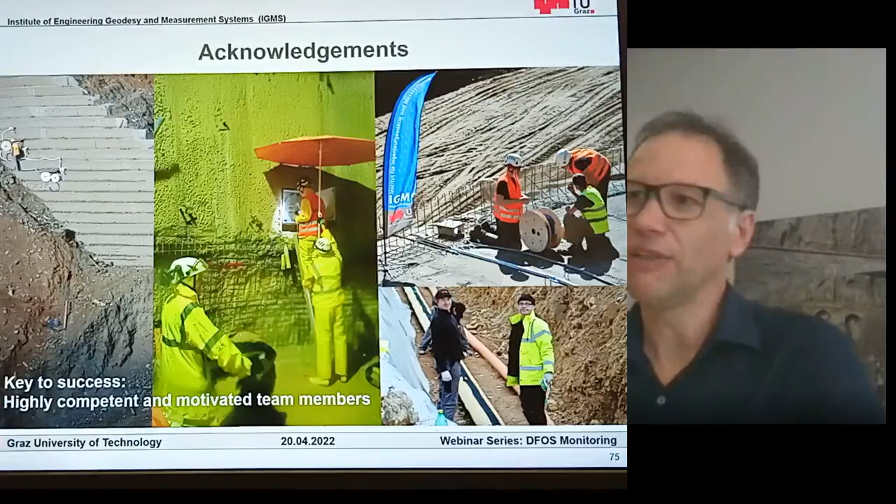I want to say it was a pleasure for me to make this talk today. However, all those projects were not just made by myself - the key to success is to have a highly competent and highly motivated team, and I'm really proud to have such a team. My staff is really well proven, even if it's climbing, if it's underground, could be nice weather as well. And with this, I would like to finish my talk, and I want to thank you very much for your attention.